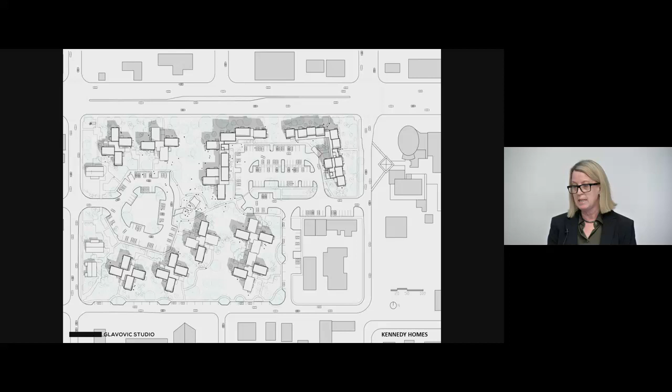It's about 132 units on about an 8-acre site. It had 7 years of community battles. There was a lot of opposition to the project, mostly because it was affordable housing. There was also a tangential set of issues that had to do with the fact that there were existing small buildings on the site.

So how do we go about making things affordable and still beautiful? How do we do this? One of the elements we chose in this project was to look at prefabricated housing. There's not a lot of that in Florida. We found this place up north near Ocala, and they did concrete prefabrication.

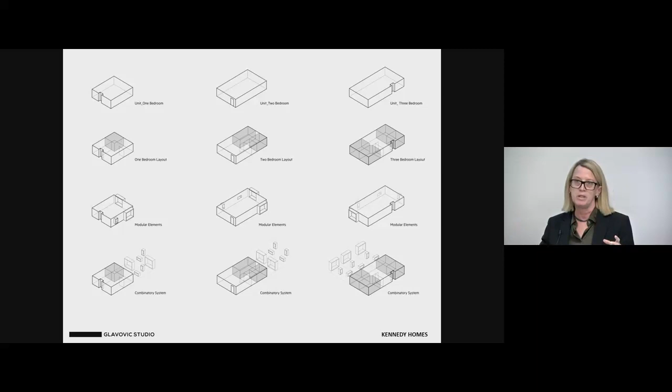So we designed the unit, the 1-bedroom unit, to be able to aggregate into a 2- and a 3-bedroom unit without expanding, just essentially keeping the width the same. We based that on an existing building in the community, a 1924 house.

Some of our goals also in this particular project were to really connect with the landscape, to celebrate living in South Florida, and for everyone. We also advocated for a kind of healthy living environment.

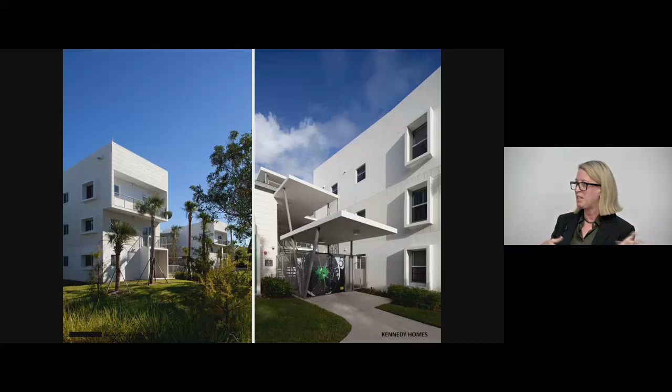We could have done 230 units, but the Housing Authority decided to stick with a lower density project because there's a historic district on the south. It reminds me of some of the conversations we just had in our review and how to transition.

One of the things I try very hard on is to understand who our client is. Our client is not the one paying the bills. Our client is the person who's going to live there, spend their lives there, or potentially learn and grow from that place. A lot of seniors, single families, a lot of different folks.

I try very hard in all these projects to think about how their life can be improved by the experience. In this project, for example, everyone had a balcony. And that just was an important metric.

It's a simple gesture, but if everyone can go outside and experience the climate and feel like they've just expanded their universe for that moment, I think that's an important thing.

We also used this modular repetition in terms of the elements on the building, the eyebrow surrounds, the balconies. And so we developed a pattern-making system that didn't cost that much because we were utilizing them and creating patterns in different ways on different buildings.

I mentioned the adaptive reuse. We kept 3 buildings that the Housing Authority did not determine were acceptable for living, and we transformed those into community centers and gyms and administration. So the legacy and the history of the place was still represented.

We also developed a very important art collection for the project. I got all my friends who were artists to donate art, and we put art throughout the project, throughout the living areas and the common areas.

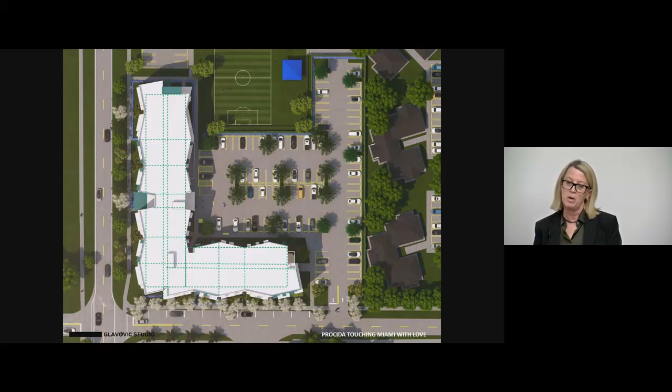The important other aspect of this model is that it was working with a community partner called Touching Miami with Love. They happen to own the property, and we're bringing the developer in. So we work very closely, and they provide after-school care, adult classes, children's programming.

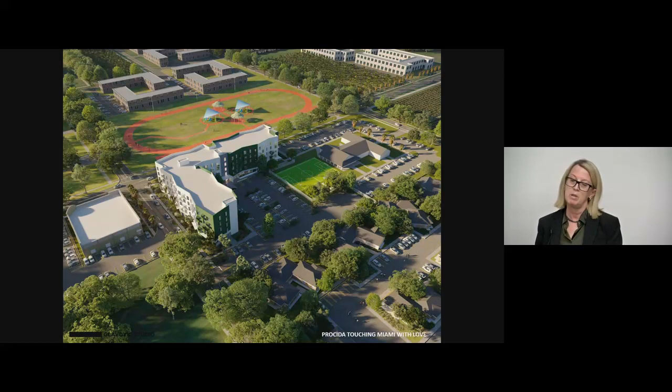So the intention is that this could be a place where people who now maybe can live and work right next to where their kids are. You can see in this image there's a park on the west side, the Touching Miami with Love facilities on the north, and then we've hidden the parking behind.

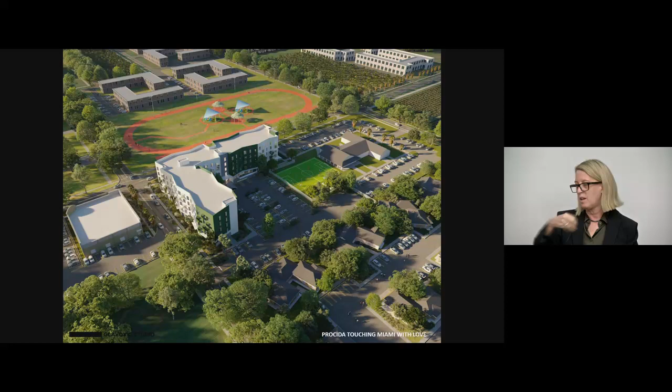And then the idea was to create this kind of chevron-shaped building that would maybe appear to break down the massing in this otherwise low-rise, low-density area.

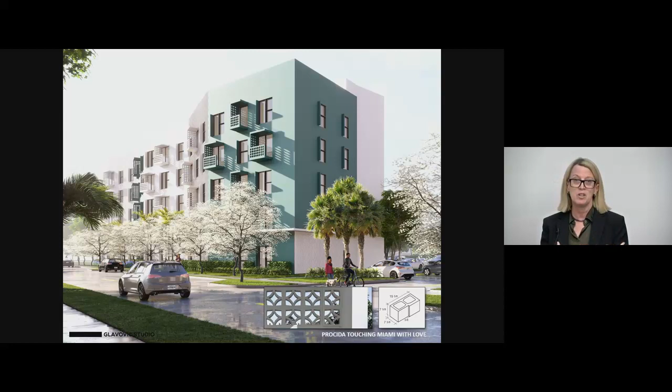And then decoration and elements that were important in the master plan, we interpreted to think about them as more balconies and light filters and ways to create a texture and a decoration that was being sought, but more maybe drawing from the mid-century modern or other contemporary elements.

And why am I obsessed with balconies? You'll see in all my projects there's balconies everywhere. One of the very practical reasons is that it's a heat mitigator. We do not increase the heat coming into the building because not every site allows us the kind of optimal orientation that we would want. So you'll see that as a theme throughout.

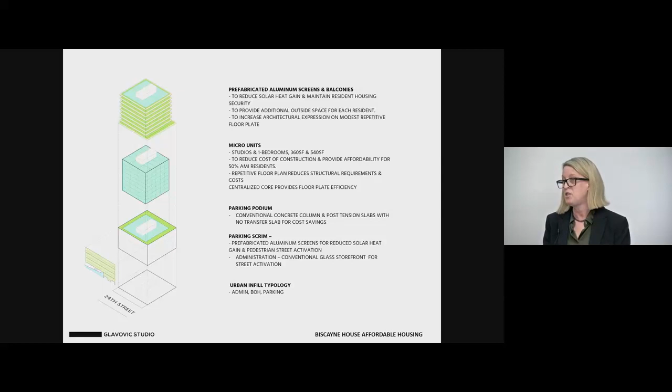You'll see the units are repetitious. Another strategy for keeping things affordable is to stack your units. It seems obvious, but you'd be surprised how often architecture uses transfer slabs to create interesting cantilevers and elements, instead of this simple centralized core with 1-bedroom and studio apartments around it, where everyone has an outside balcony to reduce heat gain. And why do we want to do that?

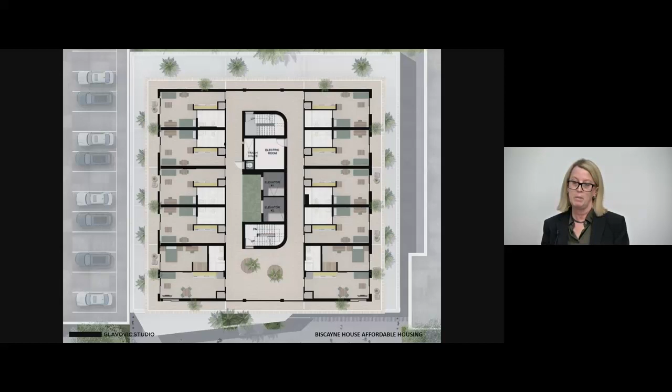Because we need housing security. If your rent keeps going up, you're not secure in your situation at home. So keeping that in mind, we employ that strategy, as well as creating the opportunity for what I referred to earlier today as view equity. We believe that everyone deserves a view, and having a balcony in Miami is quite something.

You can see how it's kind of sandwiched in between these taller buildings. We're due to break ground on this in June, so that's been quite a process to get to this point.

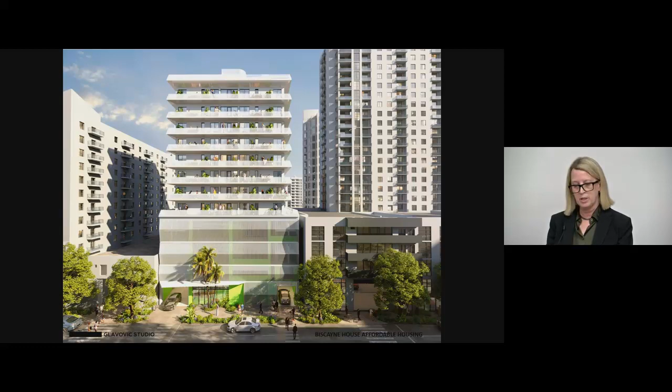On the ground floor, the intention is to still reinforce a walkable, interesting ground level, something to attract interest, but also celebrate being outside and draw from our history of contemporary architecture in South Florida. What's left on the ground floor in these small sites is very little in terms of landscape, but what one can do is still important, so we like to celebrate using indigenous landscape.

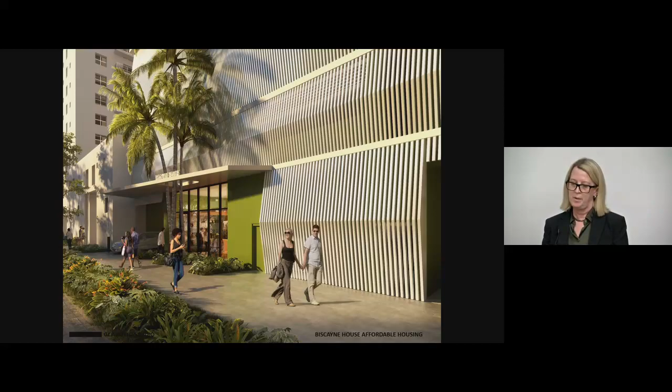This next project is what I call a transit-oriented corridor typology. We're very familiar in Florida with everything as a freeway, and then we've got all these trajectories between the freeways and the ocean edges. These corridors are very important as a typology, because that's where the transit is going, up and down where the bus route is.

On this particular site, which is a 250-unit housing project for low and very low income tenants, those earning less than 50% area median income, it follows a similar strategy to the previous one, except it's more efficient. It's nearly an acre in terms of the site, and the intention here was to develop a very slim or skinny floor plate with single-loaded corridors.

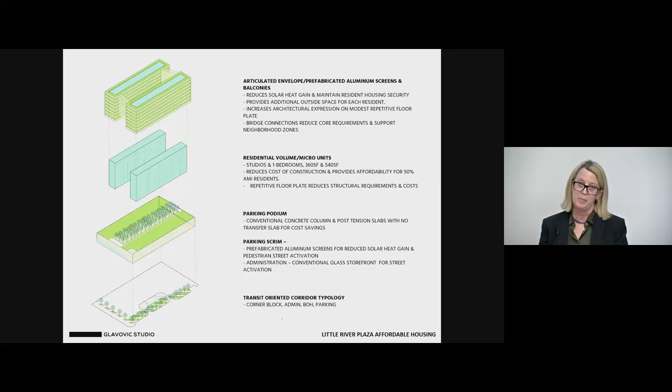So that we could increase cross ventilation in the units, surrounded by balconies on the outside, and then have this really beautiful, big, heavy, deep green zone in the middle of it. The narrower the units, the more the cross ventilation. And we used the parking requirement of the code as a way to develop an upper deck that is for the residents.

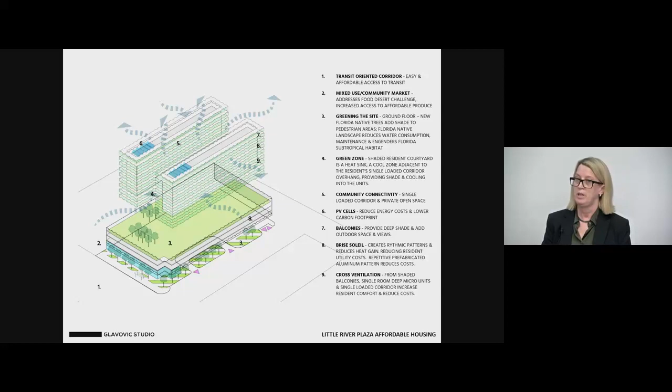Let me show you in the next slide how this developed a bit further. This is, again, stacking mostly studios. We were able to, with the code—and I know this is kind of boring for some students, but it's really important—manipulate the code to get what we want.

That's how we work in these environments, and it's critical. So if you're doing mostly affordable, you can get a percentage reduction in the size of your units, but you still want the unit to be beautiful, a place that you want to live and grow.

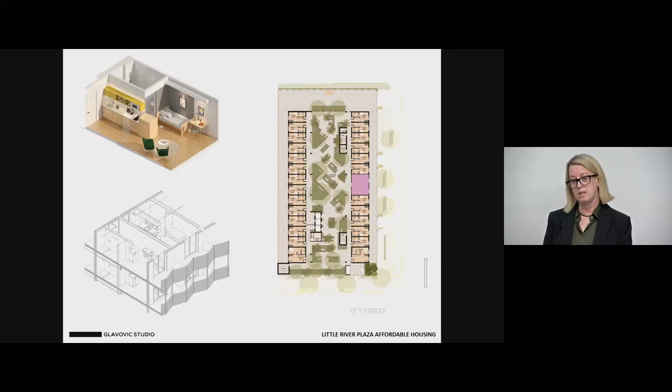You can see we modularize most of our interiors with built-in beds, built-in closets, trundle beds, so you have extra storage. And then on the corridor itself, we have mixed use—a community grocery store, and that's important because it allows people in the neighborhood to also come and enjoy and be a part of this project. And then you can see how there's a bridge between, so it's all connected, and in the middle of that is the garden area.

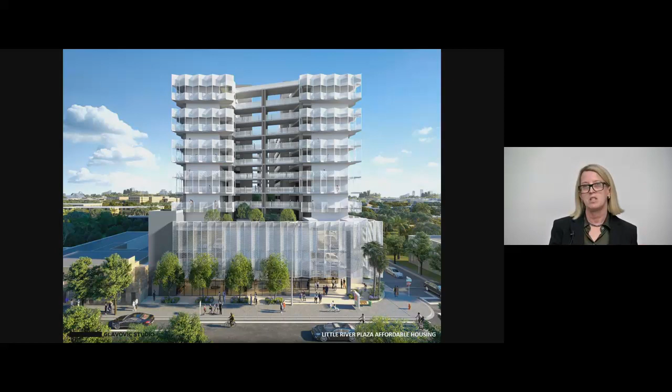One thing we're not afraid of is we want to develop a strong aesthetic. We want our buildings to be good looking, a place that everyone's proud to live in. We use the natural environment—we play off the shade and shadows, the balcony and the filigree that we're proposing. We also prefabricate all of this in terms of elements, carefully calibrating the sizes of things so there's the least amount of labor involved.

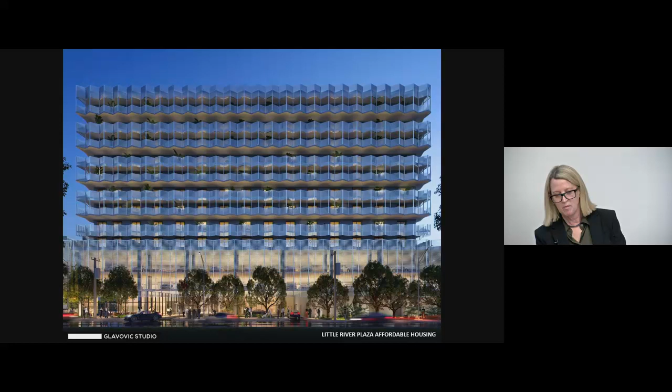So this project we just started working on. This is another typology—in this case it's mixing income levels, market and affordable, but it's also working with multiple community groups who have specific programs. This happens to be just near downtown Miami, on the west side of 95, in Overtown, and it's considered an important project to connect the community.

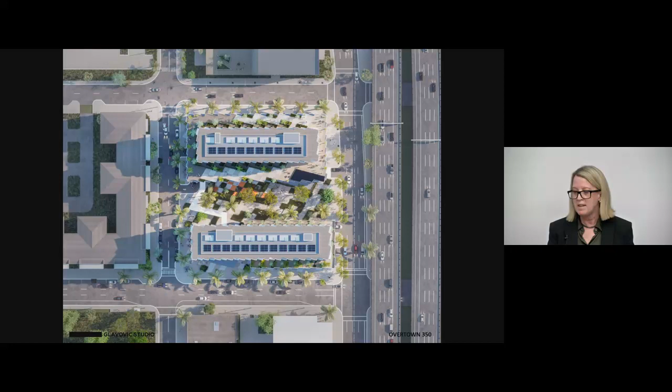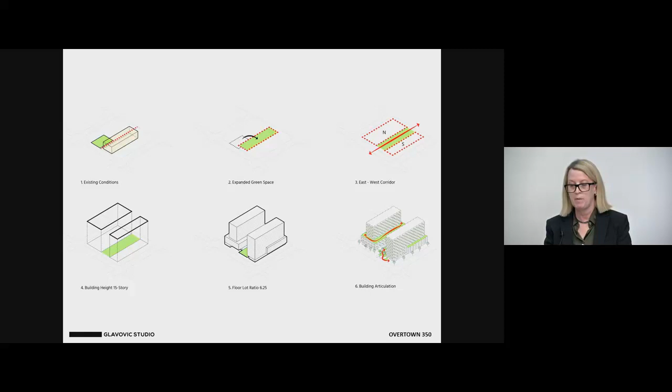So our first ideas for this are to really create a presence in that area, sort of an iconic element, but to take the existing conditions. The orange box is basically an existing community foundation. There's an existing site next to it, and we wanted to take that site and transpose it into the center, having everything revolve around the centralized plaza outdoor area—things like kids programming, a school, an aftercare school, different not-for-profit offices—and also use that element to link to downtown, which you can see in the background here.

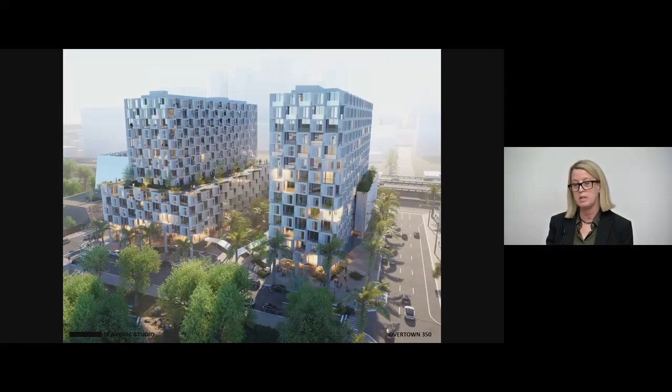Given that this is also market rate, we tried to make sure that the elements were attractive for the entire project, but you don't differentiate between market and affordable. It's all just integrated, and it's just how much you can pay that defines where you would live.

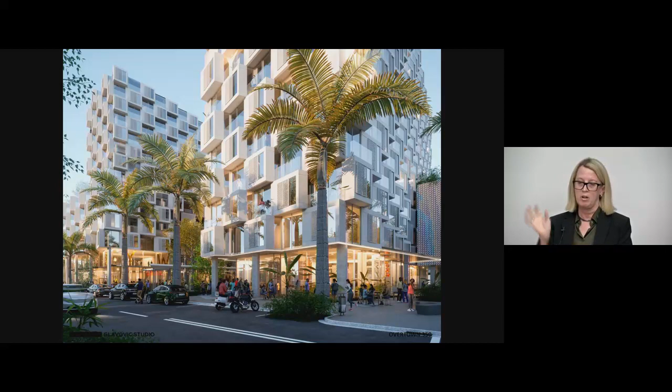On the ground floor, again, we're activating the street edge, providing screens for solar protection that are adjustable, so there's a sliding screen on the facade here, which also allows you to capture the light in a changing and varied way. Sometimes things will be open, sometimes closed, and I think that's important in urban life to create this kind of living edge, living outside.

Now I'm going to take you to Los Angeles, where we're doing a very difficult project. I don't know how many of you have been to LA, but I'm sure you know this particular area called Skid Row—it's considered the epicenter of the homelessness crisis. If you go there, most streets are filled with people living on them, and it's a very difficult environment to think about.

This is a project that utilizes technology and innovative construction techniques to try to make it less expensive. How do we do that? Well, the reality is we are forging a new system. There's never been a high-rise residential building done with this steel frame modular, prefabricated steel frame modular process.

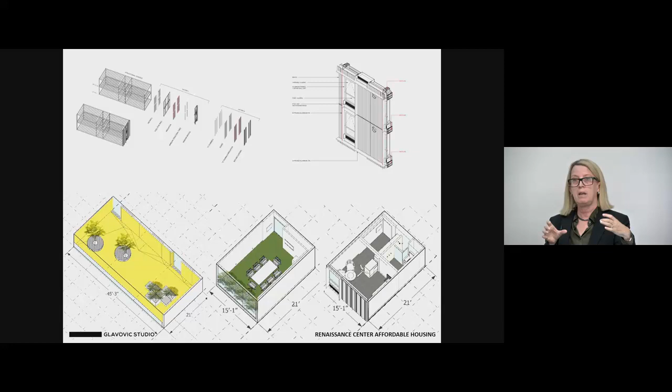On the top left, you can see the steel frame is very essential—essentially it's two units that come together, linked by the corridor, and that equals a module. Let me just go back to that for a second.

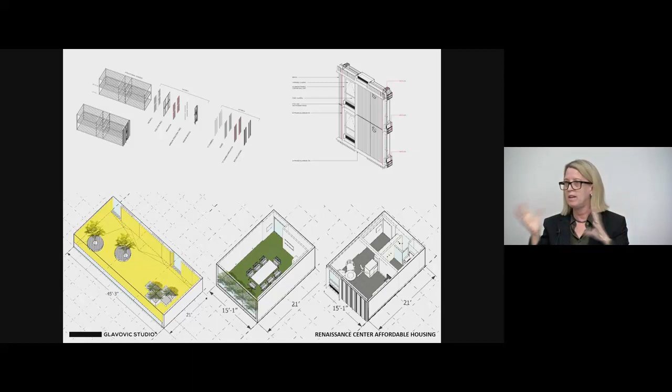So what happens is, you can see in the bottom right, this is the actual unit. The unit is prefabricated in the factory about 20 miles from the site, then shipped in fully done with all the finishes, fixtures, cabinets—except for this outer piece, which is kind of like a rain screen facade. These units are erected on site over time, and then the facade is attached after the unit is in place. There are what we call mate line connections, which are waterproofing challenges, but that's the concept of this project.

You can see here we've actually also used a three-module type for an open space that is going to be on the 7th floor.

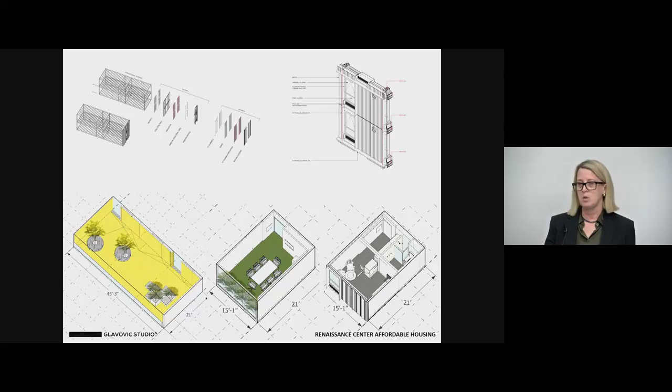We use the same module as a community room, integrating the idea of modularity into the project. In plan, the site is quite difficult—it's a small site with a triangulated component.

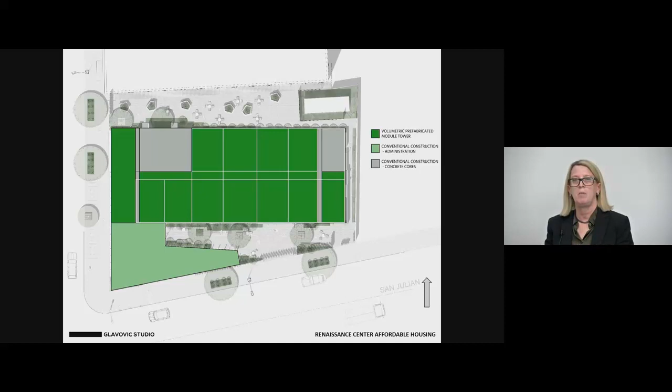In order to be efficient, stackable and repeatable, the entire tower is made of modules. Usually with modular construction you see a concrete podium to transfer loads down, but we've removed that. The basement is a concrete podium, but not above ground, making it more efficient and faster to install.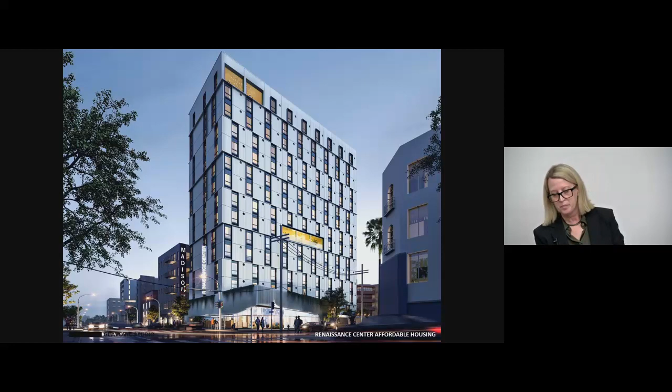The units, again, are all prefabricated. We very carefully consider how big a piece of plywood is, how a piece of lumber is, and we've calibrated everything to be efficient, bringing prices down so that rents can stay low, with everything built in.

Changing direction, something I'm very excited to be working on in the next few years is adaptive reuse. We've always been interested in adaptive reuse, but we're seeing now that you save about 20% of the cost of a project, and it's about 20% faster when you can adapt an existing building to housing.

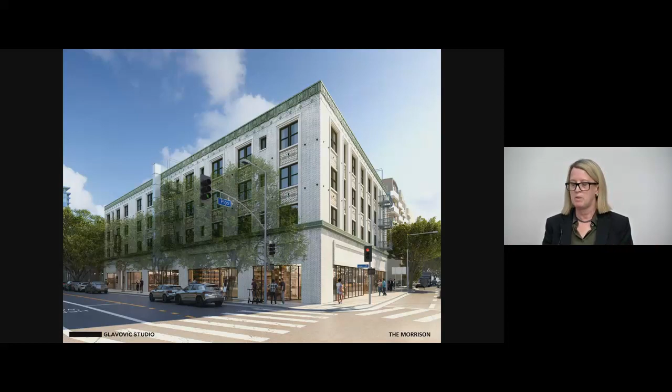So what makes a good potential project for adaptive reuse? This is a project you may know of, The Doors—the famous rock band from the 70s. They made this building well known because their album cover was Morrison Hotel. But it's actually stayed empty for 25 years. It's a 1914 structure.

So what happens when something stays empty? The entire community around it is affected—the neighborhood changes, it isn't quite what it needs to be. Bringing housing into these spaces is critical to not just invigorate the building, but also reinforce historical connections in the neighborhood.

This is an E-shaped existing plan. So why one building versus another? This happened to have what they called SRO, single room occupancy. But one challenge our clients have found is that with shared bathrooms, there are a lot of challenges with tenants—residents just have a hard time with it.

In this building as well, which is called The Morrison—let me repeat something here—you'll see this is a repetitive module. We're enlarging the bathroom so that everyone has their own. The good thing is that it already has plumbing, because at some point it was a hotel.

So when you choose adapting buildings to housing, you have to think about costs and infrastructure, what you have to work with. This type of building is well suited—it's also a 4-story building, so you don't have to put in high-rise fire requirements and all sorts of extra utility spaces that become challenging.

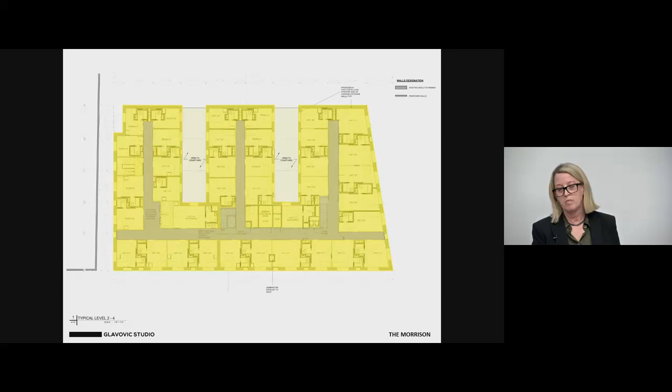These are just existing buildings—you see no sort of architectural hand on the outside. They're beautifully designed; this was Curlett and Beelman in 1924, called the Insurance Exchange Building.

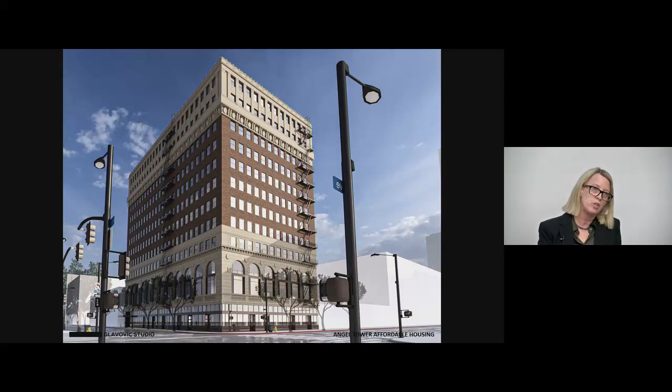But this building is a little harder because it was a commercial building, and commercial buildings inherently don't have an easy-to-convert footprint or infrastructure. It's a lot more expensive and takes a lot longer to do. But it had a rational floor plan, so there was merit to the client's choice to buy the building and turn it into affordable housing based on its layout. In Los Angeles there are seismic issues and a lot of structural challenges, so there's a lot of infrastructure improvement needed in a building like this. It's 12 stories, but we were able to do 248 units, and are just finishing construction documents on this.

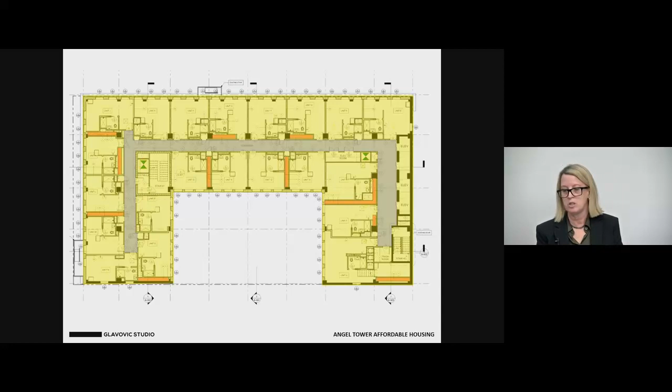I want to change tack now and talk about culture as a public realm and why this is important. In fact, most of our early projects worked more on the culture side than the housing side, and I started to realize that housing itself was part of the public realm, not necessarily a separate program—that everyone had the right to that experience.

One of my very first projects in South Florida was the Young Circle Arts Park project. I was actually hired to design a wedding gazebo, and after spending some time thinking, I didn't think a wedding gazebo was going to do a whole lot for this downtown space. This was the existing Hollywood Arts Park at the time—people had a difficult time getting to it, crossing the street. There were a lot of challenging elements to it.

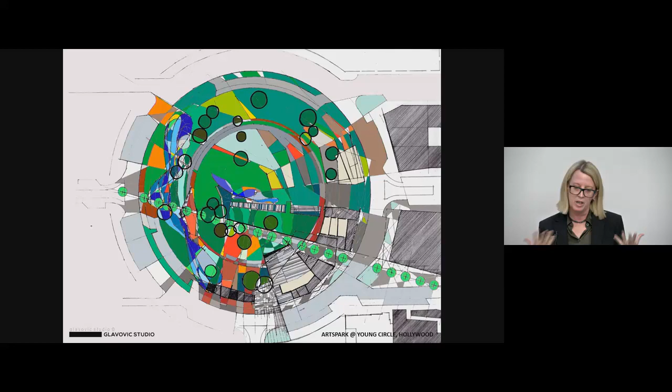Rolling forward several years later—maybe seven years—and this project took me eleven years to do, so you have to have stamina when doing these kinds of projects. What we did was come back and say, you shouldn't do a gazebo, what you should do is arts programming.

There's an amazing project right on the southeast corner called the Art and Culture Center, a very vibrant arts organization with hundreds of artists associated with it, and we realized this was a gem. So we came up with a project that really celebrated how the arts can transform an urban environment—this is the center and the heart of Hollywood.

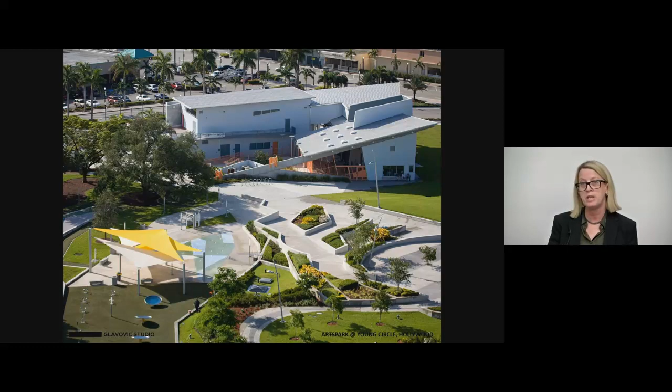So finally, over the years, it's become a space and place where people are celebrating art and culture. We invented programs such as a glass blowing studio, metal studio, painting workshops, a dance studio, and a rehearsal studio for an amphitheater that we also designed.

But most importantly, we also celebrated the existing landscape on the site and created outdoor reading rooms, places to have lunch, go for a walk from downtown, or take a break at the end of the day.

And the architecture is very expressive—it expresses the fact that there's no front or back, it's just in the round. You literally have to figure out how to serve spaces where you can't see the back, which is quite hard, by the way.

It also took a long time because it was done in multiple phases. One of the important things was recognizing the heritage of this place, working with the original Young Circle shapes and places, and also with a historic neighborhood.

Professor Rifkin referred to this project—this is the Girls Club Foundation, and this is the existing building before we got our hands on it. Why is it important? It was just a little invisible building just north of City Hall, in a district called the Flagler Village District in downtown Fort Lauderdale, behind the main parking lot of City Hall, and really unnoticed for the most part.

The client is an artist, and she is also a collector of women's art and works very hard to promote women artists. Her work is very textural and uses collage and video. We were keen to represent her in a way that communicated why this is so important in our culture. One of my first sketches was, in some ways, just to erase things—to remove things.

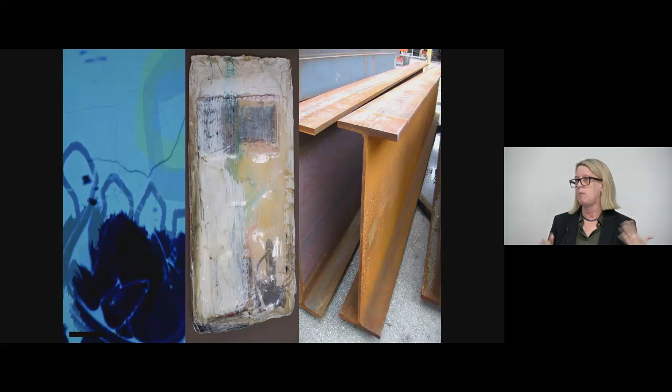I also had a very challenging program—we weren't allowed to expand the site, so we could only really remove in order to add, which is an interesting concept, right? Mostly we want to add and make more of something. So we extracted existing overhangs and removed stuff, and we also wanted to create this idea that when you come in, it's a surprise, dealing with light.

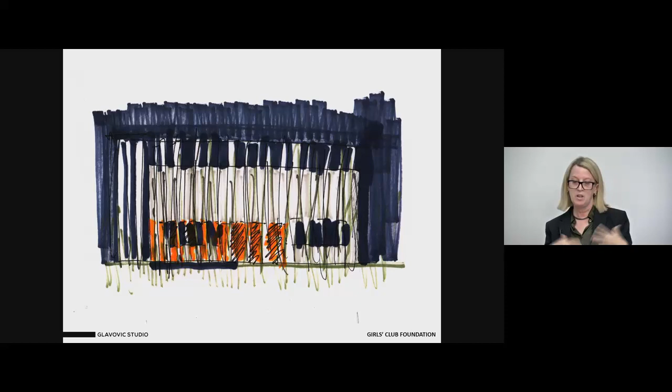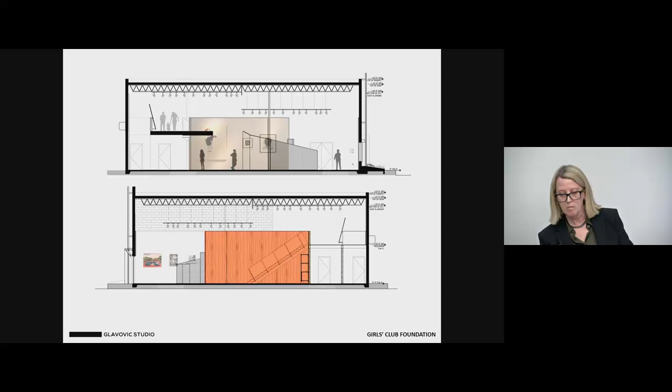One of my favorite parts of architecture is under construction. It's just when you really start to see the essence of your project, your buildings come to life, and as they evolve, things that maybe are surprising, things you're happy about, and things you're not so happy about—but at least it's a place to really start to read and create and understand the legibility of the process.

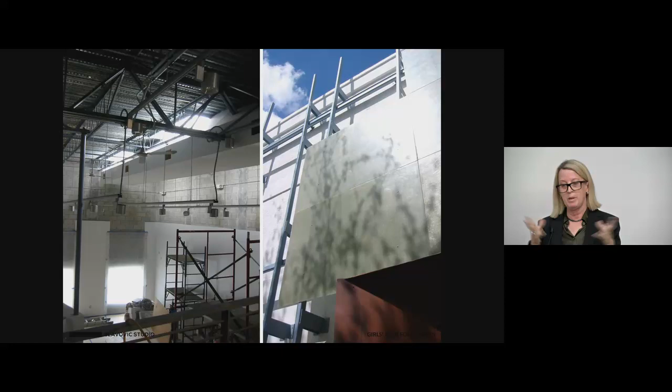We used, in the local area, I was interested in trying to find a local industry that would allow us to find a material, so we used this polymer type resin to create this new facade, which is essentially 4x6 panels with a steel frame structure behind. I couldn't add any trees, so I wanted a surface that in a way captured the trees and the light and the temporal change on its surface. And that's what this facade did.

In the center of it was something that harkens back to our client's use of steel and materials, and of course influenced by Mr. Serra, who we lost recently. This is a patina—a paint patina. We didn't have enough money to use Corten steel, so we found this paint that will actually oxidize the steel, and it creates that patina that you see in some of these amazing artworks of Serra.

At night, the intention was to create a beacon, literally, so people could find us and see where it was, and that it spoke to something intriguing behind the walls of it, while also revealing its own structure. At times we would turn the lights off and it would be a projection surface.

Inside, you can start to see the elements, which are quite fun—the codifying with color is where that is. There's a little exhibition space at the back that was actually our kitchen. If you know Grete Schütte-Lihotzky's Frankfurt kitchen, this was my ode to her and the idea that we need to show domesticity in women's work and women's lives in a different way—that was kind of a play on that.

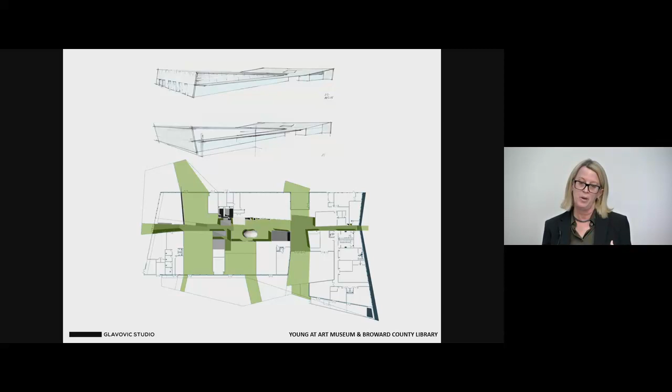Anyway, the site was a terrible site—it was filled with muck. No one wanted it, so they gave it to us, to the museum, because no one else would work on it. Our site happened to be located right on I-95, a major north-south route, so high visibility. We took advantage of that and aligned the layout along I-95, creating essentially a warehouse for exhibition programming that could change and navigate through, with green lines and green spaces creating an internal landscape element that in a way was the guide to a very complex program.

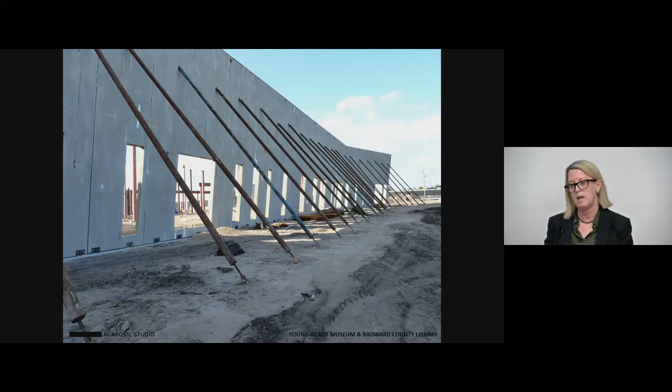I mentioned that I love construction, but why is this important? You right now are doing your own concrete wall, which is really going to be beautiful, and this was a tilt-up version of that. We had to spend a lot of time understanding how light would be reflected off that surface, which is a chevron type surface, how it would amplify, and the different openings on the north, south, east, and west. I think there are lessons to be learned just in the making of architecture that one can constantly celebrate.

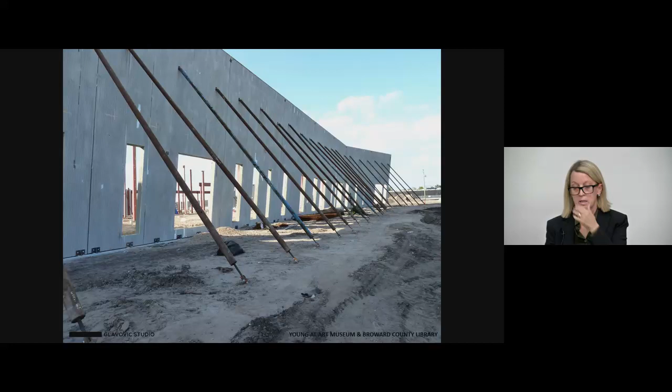This is the main entrance of that building on the south side. It's actually an art institute as well as exhibition spaces. One of the great things is that kids really seem to love the building, which is really cool. They start to think of orange as a color that talks about architecture—they ended up doing orange T-shirts, and it just became a whole way of thinking about language.

One of the important things in a big warehouse is how to carve out space and how to bring natural light in. This was an area where the kids could eat outside and still be safe, surrounded by views into the courtyard, as well as create natural flues for cross-ventilation.

On the side facing the highway, there was a large retention area, and this was an important visual element. This was in 2010, and we started work in 2007. We brought in cisterns and exposed all the inside utilities so there was a legibility to learning in that environment. Similar to your building here, there's an understanding that there's a system behind this building that works and is exposed, creating opportunities for learning.

Of course, who is our client? It seems obvious, but it's really important to constantly remind yourself. This meant creating spaces that people feel comfortable in to take risks, whether it's painting or making something. Another important part of the project was having polished concrete floors and things that are easy to clean, considering the maintenance side of things as well.

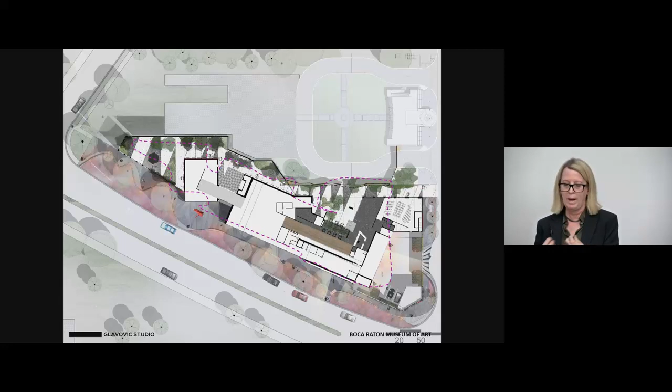The last few projects—this is one I've been working on also for about 8 years now, up at the Boca Raton Museum of Art. I show this to you not because it's necessarily my favorite project, but to show how you do something with very little. This is a very large existing building in downtown Boca Raton, with a Mizner-esque language of representation. We had to deal with the fact that there's a very prescribed way of working and expressing oneself. Our charge was to fix the loading dock gate, create a new entrance from the back to make it look like the front, and activate the outside of the building. Not easy, right? Because those things are all very ephemeral—there's either a fence element or a landscape element.

So I worked with Roberto Rovira, a colleague landscape architect from FIU, and he did an amazing job. I was also commissioned to do an art element called Mending Wall, which became the new fence, essentially, for the project. We gutted the inside of the building on the corner to create a new gallery space, and created this beautifully lit loading dock gate that is now an art element. At the time it was named Mending Wall after Robert Frost because there was a lot of issues with fencing going on—I won't go into that, but there's a lot more to it.

This is on Federal Highway. One of the biggest challenges was that people were driving by between 30 and 50 miles an hour and not really seeing the museum. It's a giant building and no one knew where it was. So we brought the programming from the inside to the outside—sculpture, landscape, benches—turning it into an outdoor display area. In the courtyard, we made sure the art that was brought in, this is Mark Mennin, was actually functional art so people could interact with it and spend time, all for free. You don't have to go inside the museum. That became very important as well.

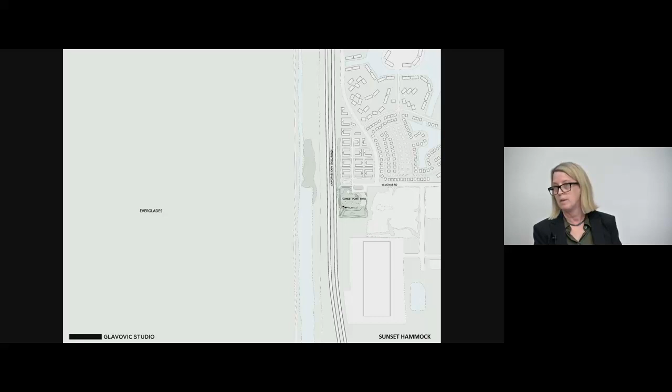So I went to the site and discovered there's this big mound on the site, which turned out had garbage in it and was just being covered in grass. And I thought, well, how do you see over it? The Everglades, we all know, is just horizontal and flat—when you look at it, it's just a line. So the idea of elevating in Florida, to me, is very interesting—how a topography shift works. There may not be this literal view of the Everglades. By the way, we just photographed this last week—it just got finished. Now, by elevating people, they start to feel like they're on a hammock, in this disrupted horizontal plane.

And then looking towards the Everglades may not be that you see the sunset, because most of the park doesn't even stay open for long enough to see the sunset. But it's a place that you can be saturated by this rich color of red, and the sense that this is a space that has some curiosity to it.

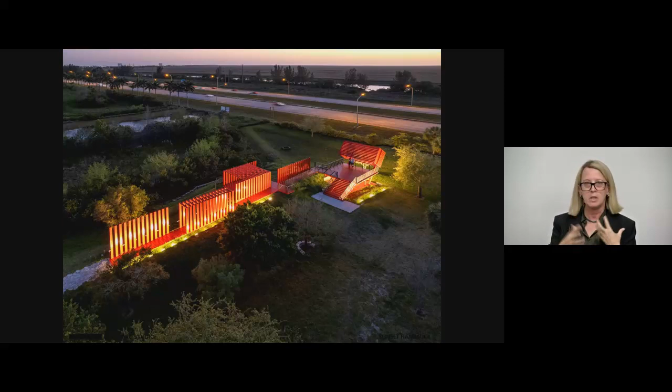And I also wanted it to be visible from this infrastructure. I wanted to have a conversation about how infrastructure and our precarious relationship to this incredible body of water and landscape kind of needs to be addressed.

So this is an occupiable sculpture. At the very end, this large boxy element is actually what I call a community periscope. We have polished chrome inside, and it actually reflects what's beyond it back into this kind of surface.

So that's what I have to share with you, and I'm happy to answer any questions.

Thank you. I'm happy to open the floor to questions, but I wanted to first ask you to talk a little bit about the importance of color in your work.

I love it. Well, for me, there's different ways I use color. I mean, there's an obvious wayfinding. There's a wayfinding system in most of our projects.

Like at Kennedy Homes, we learned after listening to a lot of oral history from the neighbors that fruit trees used to be outside their front doors. So we thought that showing the colors of yellow and orange, talking about the fruit, the brightness, was a way to connect to something beyond the architecture. And then we also did a series of graphic signage elements that showed giant oranges and giant fruit. That's an element of color as well.